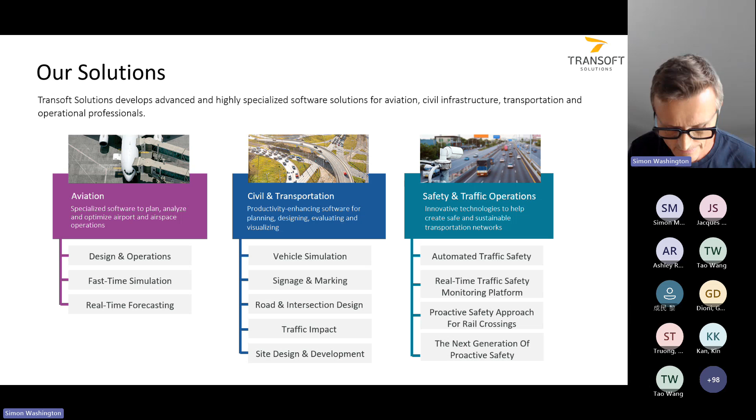Just a real brief overview of Transoft. There's three divisions of Transoft: aviation division, the civil and transportation division, and safety and traffic operations. So AMAG essentially has become the heart and soul of the safety and traffic operations unit within Transoft, and we'll be delivering our products in addition to other products that sit in that envelope.

So introducing the topic of the day, I'm just going to spend a very small amount of time introducing a couple of things about video analytics, and then I'm going to turn it over to our great speakers that we have lined up. The first thing I want to talk about is just why customers are getting value out of video analytics, and really, what is the video analytics value chain, where our customers are telling us they get value. And I guess just very quickly, we're taking video, LiDAR, and thermal camera information, processing it through an AI engine. The AI maturity is advancing all the time, and we're probably about 10 years in that as a profession in the journey of AI development. And it's at the maturity now where we can do a lot of things that add value for our customers.

And I'll illustrate that very quickly. From the AI, everything starts there and it goes downstream when we can use that AI information to produce a lot of analytics that are useful for our customers. I think one of the key aspects for the value proposition for customers of video analytics is that our customers can get information and objective evidence to make decisions, to plan a network, to manage a network, to operate a network, in ways that they just can't get from other sensor technologies.

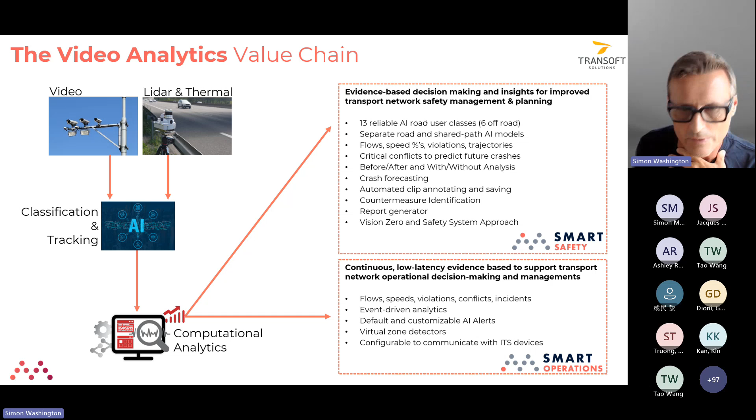On the operations side, we have continuous analytics that help our customers detect events that are happening in real time, influence the outcomes of those events, understand how frequently those events are happening, and things like that. So that's really the value proposition of video analytics.

What we're essentially doing with our customers is complementing existing practice, which has been built around the focus on crashes and crash information, using deaths and injuries that have happened, so moving from a lagging indicator of safety performance to a leading indicator of safety performance.

Those leading indicators are obtained by focusing on critical conflicts, which have been shown now for over a decade of research, that if we measure these critical conflicts precisely and in specific ways, it is the single best predictor of future crashes. And of course, using a leading indicator is a game changer for our customers, and you'll hear about that from some of the speakers today.

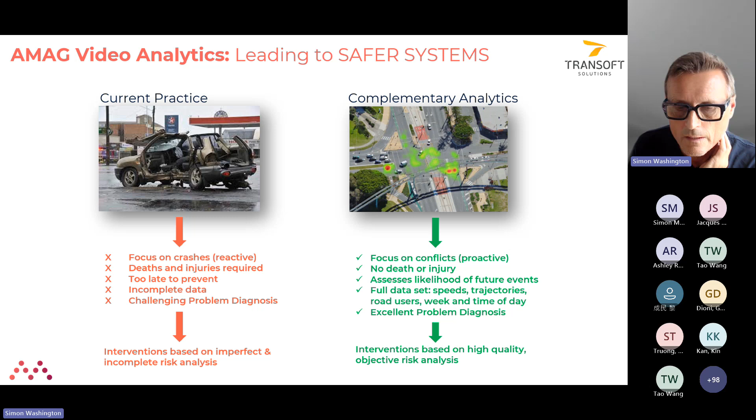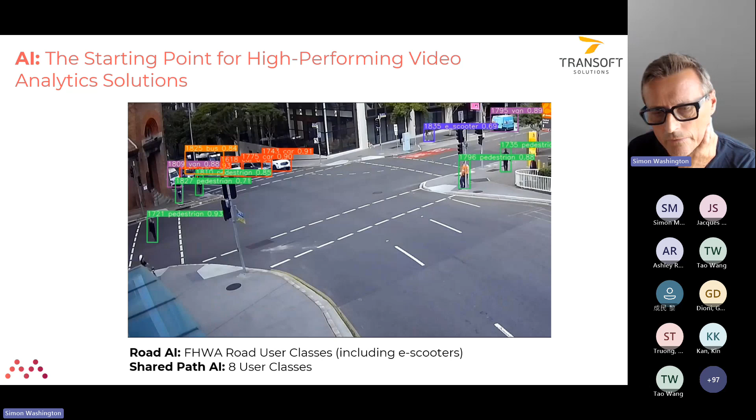But what's key to point out here is that we can see where these pedestrians are not in the crosswalk, how fast they're walking, where the scooter users are, how fast the cars are going, whether road users are on a collision course with each other, and all kinds of things that you can't determine from other sensor types.

So really what the AI—I won't spend a lot of time on this—but the AI is fairly complex, and there are lots of challenges to get it right, and that's why it's still a maturing field. I won't talk through a lot of these challenges. Happy to answer questions later if there are any.

There are lots of technical issues that have to be resolved. For example, an AI mistaking a shadow of a person as another person, and detecting a masked arm as a person, and things like that. So there are those kinds of classification errors, as well as where exactly a road user is on the pavement—are they in the center of the lane or the side of the lane, and those sorts of things. We have to address all of those issues in the AI in order for the analytics to be robust downstream.

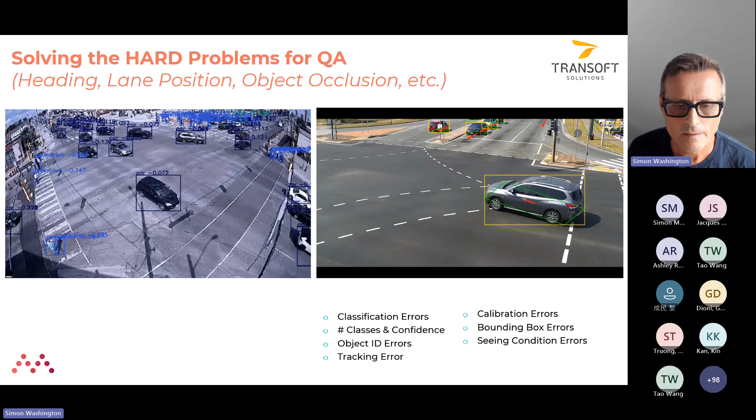So, last couple of slides here. How do we translate the AI into analytics for our customer? Here is one example, I'll just walk through very quickly. What we use and rely on is this process: if we go to a site and monitor the location...

You can see a conflict that happened here—sorry, it's a little bit small—but there's a conflict between two vehicles that we track in our technology.

When we observe a site over time, what we get as a result is what we call heat maps, an indication of the frequency and density of where those conflicts are occurring. And that can be filtered by time of day, by type of road user, by movement direction, and all kinds of things to understand the risk profile at the site.

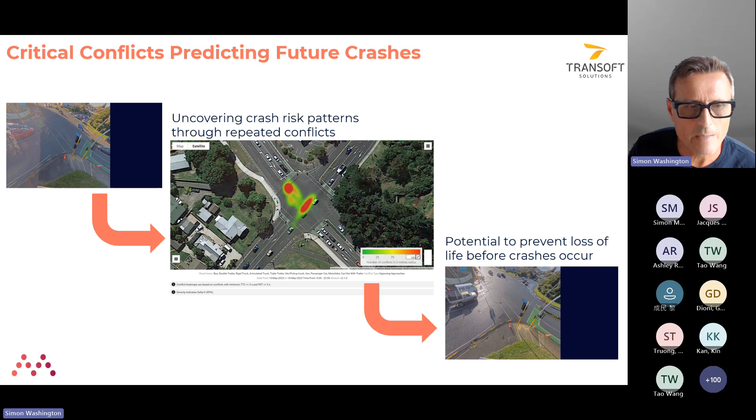And this is the same location. That heat map that we see was actually generated before this, and then we see a crash occur. What we're really trying to use that heat map for is to inform us about risk before we get the crashes on the right. But what we know from experience is that these heat maps are reliable predictors of future crashes, and that's exactly why we use this technology.

And then my last slide before I turn it over to our first speaker—this is another example of continuous analytics where we're using the platform. For some reason this video is not playing, but this is a site for a customer where the continuous video analytics—you can see the highlighted green vehicle.

That vehicle proceeds in this video to make an illegal movement at this location. The customer has told us that they struggle with any other way to identify that kind of movement, the frequency of how it happens, and the circumstances under which those illegal movements happen. So that vehicle comes through and makes a left turn there, which is prohibited.

There are three illegal movements at this location that the customer is using our video analytics to track and report back to them, send clips, and do essentially a set of eyes to observe how this site is performing and give them objective evidence to understand how to make improvements.

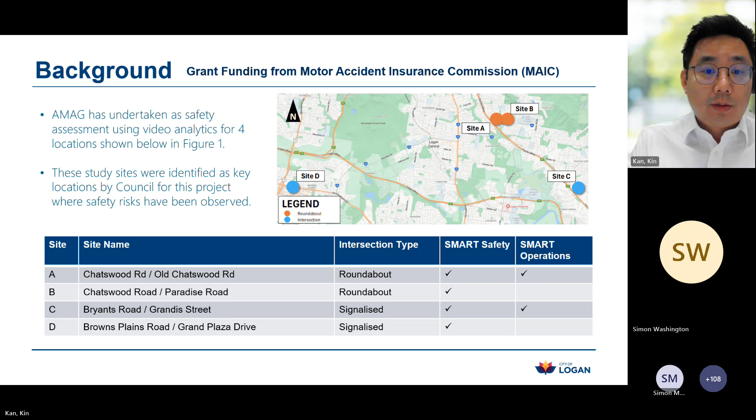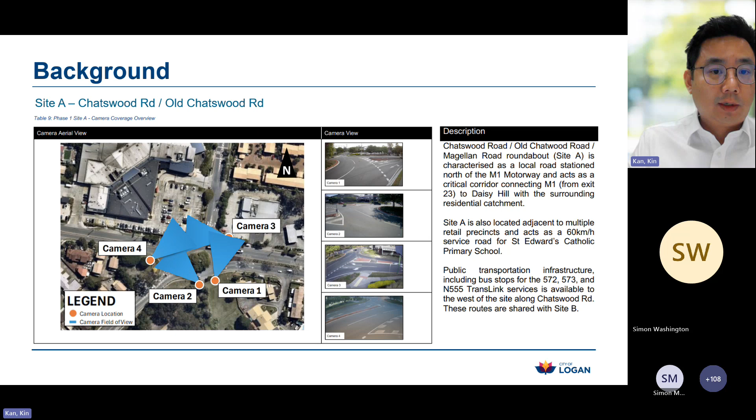The second location is the Paradise Road roundabout. This location is close to the first roundabout and a primary school. Again, we set up 4 cameras to capture all the angles.

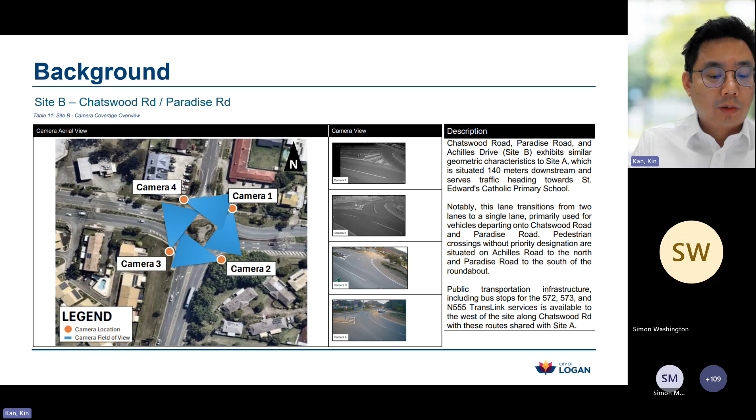The next one is the Bryants Road and Grandis Street signalized intersection. This is a 4-way intersection near a major shopping center. We focus our temporary camera on the slip lane to try to capture specific data on vehicle movement and pedestrian movement within the intersections.

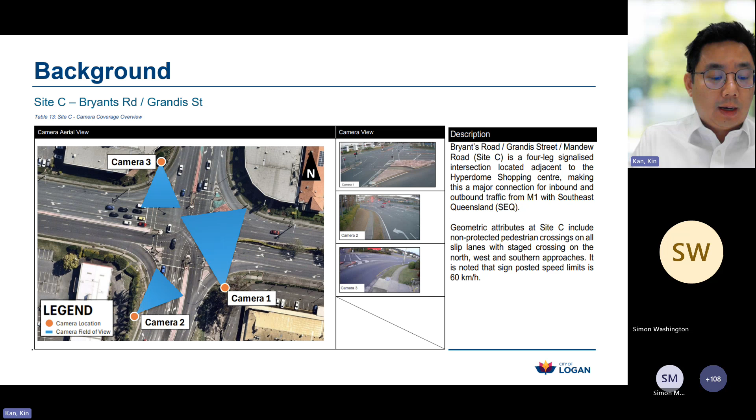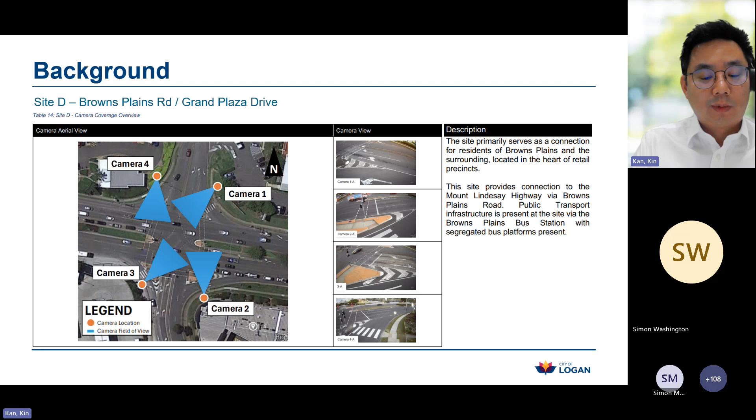The last one is the Grand Plaza Drive signalized intersection. This is a really busy intersection near a major bus station. What we're trying to focus on here is capturing data related to the slip lane and pedestrian crossing.

As Simon highlighted earlier, smart safety actually uses advanced AI to analyze video footage. It identifies potential conflicts by measuring time to collision and post-encroachment time on a frame-by-frame basis. For more technical calculation details, I'm sure Simon would be happy to share that after the presentation.

If you look at the top image in this slide, you'll see a heat map generated by the Smart Safety platform. It picks up all potential conflicts within a certain radius and displays a heat map of traffic patterns and conflict areas. This helps us identify high risk areas at each location. The lower image is a screenshot of a specific incident. In this example, it shows a vehicle failing to give way to circulating traffic inside the roundabout. The video clip from the Smart Safety System is also really helpful for our engineers to understand the situation leading up to a potential conflict, and allows us to pinpoint specific behavior that could cause near misses.

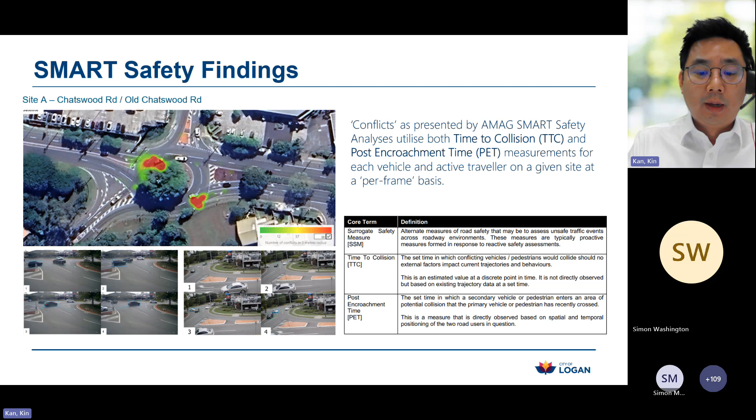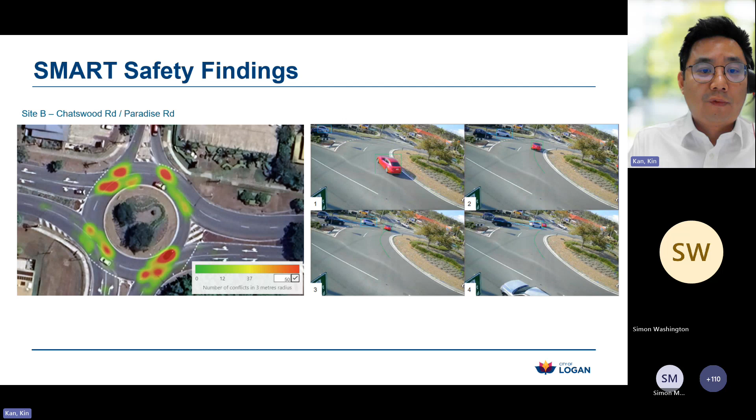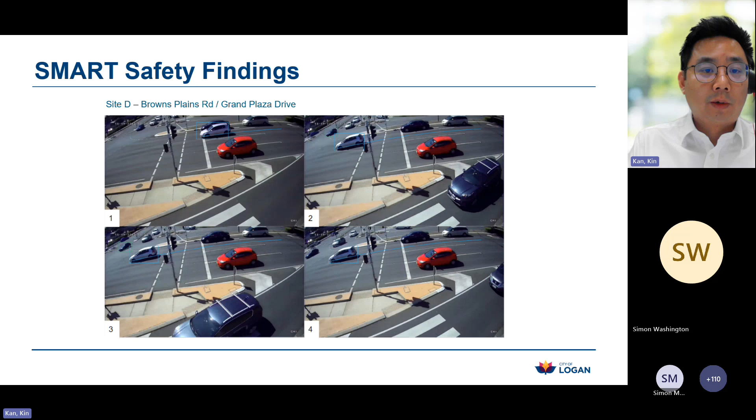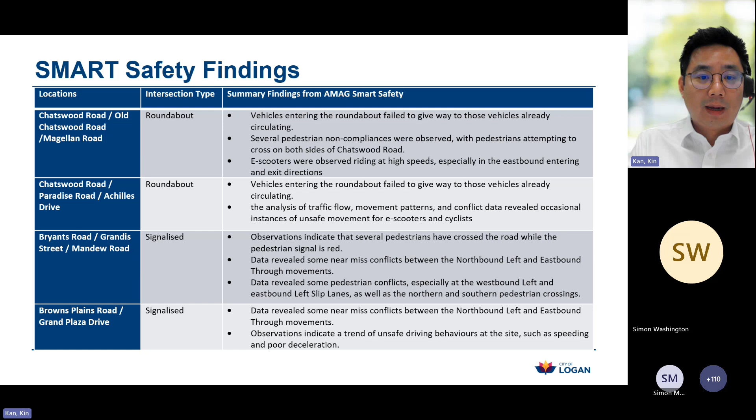Building on these insights, we extended the project to include smart operation at 2 major locations for real-time monitoring. The first location is the Grandis Street traffic signals. Here we installed a CCTV camera on an extension pole attached to the signal pole, which helps us capture real-time data.

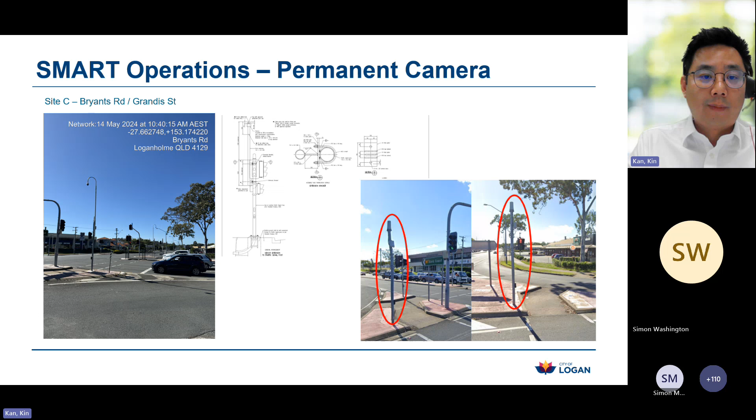The second location we install the smart operation is the Old Chatswood Road roundabout. This location is challenging because we're not able to tap into the nearby power supply, so we have to install a solar power camera.

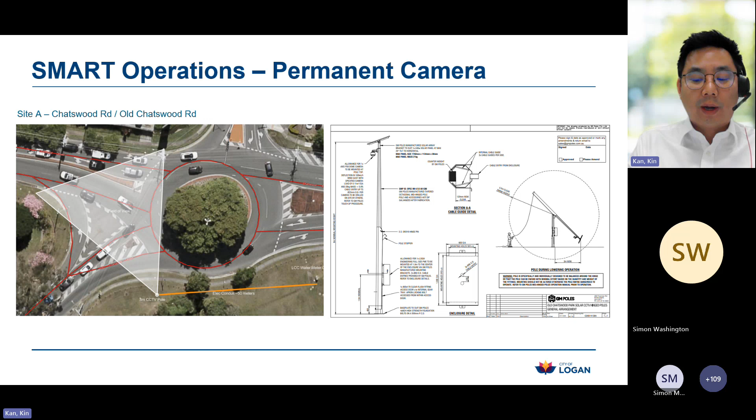We had to work with our design team to create a unique solar panel setup that could run the camera and other equipment for 4 consecutive days, even in bad weather conditions. Also, due to the weight limit on the pole, we had to install the marine grade battery inside the pit.

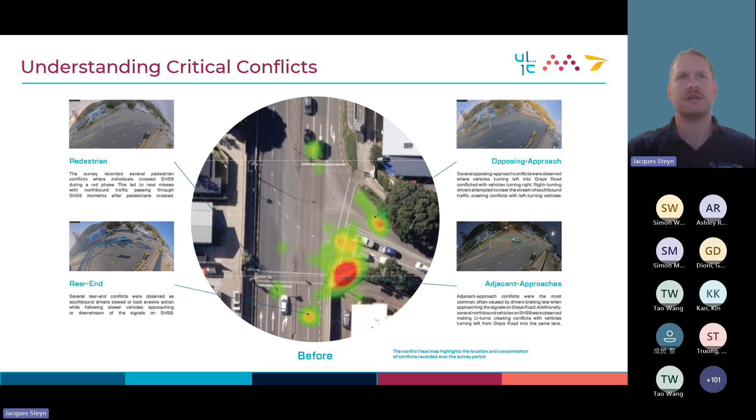We were able to identify and compare these risks before and after interventions were implemented. In this instance, we were able to understand the underlying conflicts and clearly show the effectiveness of signal timing upgrades and minor improvements at reducing the conflict rates at the intersection, reducing harm to vulnerable road users.

This ability to streamline and optimize investment decision-making for network managers is invaluable, changing our focus from the lag indicators of crash history to the lead indicators of conflicts and near misses.

We can have a strong evidence base with visual data like this to achieve buy-in from investors, stakeholders, politicians, and the community, which can often be the hardest part.

We found this to be hugely beneficial to our partners throughout New Zealand. Using this Smart Safety platform can help us to understand and confirm high-risk areas without waiting for someone to get hurt, to optimise investment, and ultimately to save lives.

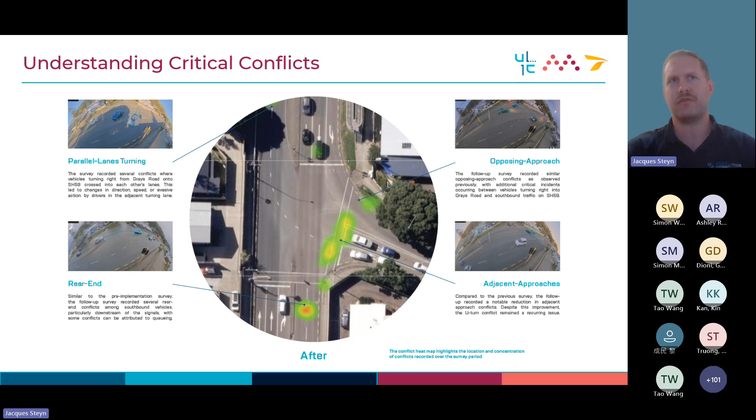They never exited the other side of the intersection. Instead, they were hit by a car travelling through it. They suffered serious injuries. They probably weren't the first person riding their bicycle to work, school, or home to be seriously injured here, and they definitely weren't the last.

In the 10 years from 2012, there were 10 crashes resulting in serious injury. 6 of the 10 involved people riding bicycles, and 4 involved people riding a motorcycle or scooter. There were a further 8 crashes involving a person riding a bicycle that resulted in minor injury. One serious crash is one too many.

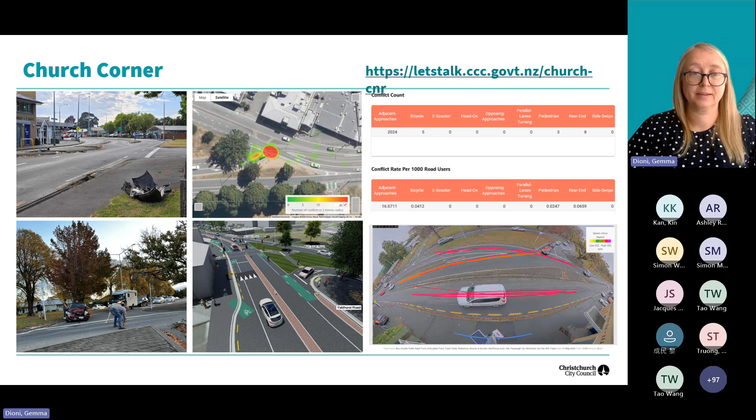On to my second example, collecting the data to provide confidence. It's always a treat to wake up to headlines: major Christchurch roundabout upgrade, an abomination, some road users say. It follows a notoriously dangerous Christchurch roundabout that has been upgraded, but now some road users are suggesting downgrade may be a better word for the work done.

The Cashmere-Centaurus intersection is a four-leg roundabout at the foot of the Port Hills in the southern suburbs of Ōtautahi. There are several major geometric issues. In addition, this roundabout is well used by people walking, biking, motorcycling, driving. This includes tamariki and rangatahi travelling to schools in the area.

Having so many different people using this roundabout means that it's classed as high risk. That means that using this roundabout carries a higher than usual risk when taking into account the likelihood and consequence of fatal or serious injury crashes.

The solution, to the dismay of some of our submitters, was to improve on what was there to solve a safety issue, rather than providing the very expensive traffic lights.

The central roundabout was increased in size through a new concrete apron. Safe speed platforms were added on 2 approaches and departures, with standard speed humps provided on 2 other approaches and departures to manage speeds of people entering and leaving the intersection, even when they're going uphill.

The removal of the turn lanes to narrow the space on the approach, especially on Colombo Street, was to provide for people cycling to claim the lane, and sharrows were marked to highlight to people driving that people cycling are present here, and not just those roadies. Families, sometimes 3 to 4, on a single bicycle doing the school run have been observed at this location.

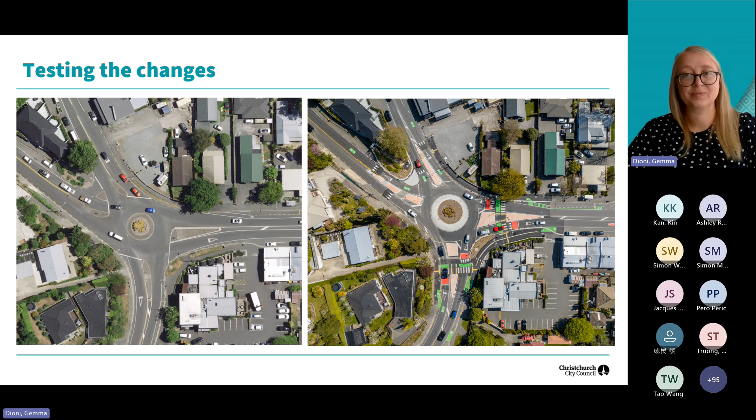Thank you very much, Gemma, and thank you to all of our speakers. Some great presentations there. It's fantastic to visualize and learn more about these deployments, which are clearly enabling you to move from those kind of lag indicators to the lead indicators, i.e. we no longer have to wait for the crashes and injuries or worse, deaths to occur before we can make some informed evidence-based decisions around our traffic planning and safety measures.

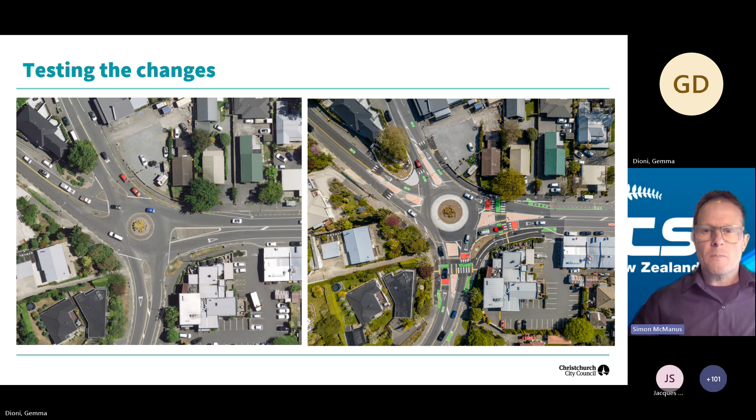So we do have a number of questions in the Q&A, so I'll jump straight to those. We have our first question from Andrew Thakurdis, and it's a question for Kim Khan. His question is: the funding for your safety and smart operations, one-off or ongoing for these intersections that you've explored today?

The funding is one-off because at the moment, Council is currently reviewing the feedback for the initial implementation. Further expansion will depend on the outcome of the evaluation and the funding source. I hope that answers the question.

Great, thanks very much. Moving quickly along to the next one, Tim Muller from Resolve Group, asking how much data or sampling time is required to build a reliable model, i.e. the heat maps, to perhaps support a proposed intervention. I guess that's a tricky question to answer. Perhaps Kim or Gemma, would you like to answer that one? How much time did you need to gather data before you felt you were in a position to make decisions?

I'll answer a little bit first, and then maybe Jacques can answer later. We actually capture for the smart safety system a good quality data for at least 10 days to show reliable data. We actually capture the data during different time periods, not just in the same month. We split it into different months to capture all this data using the temporary camera. But the deployment of the smart safety system is straightforward. Any traffic survey company which has the camera can do that.